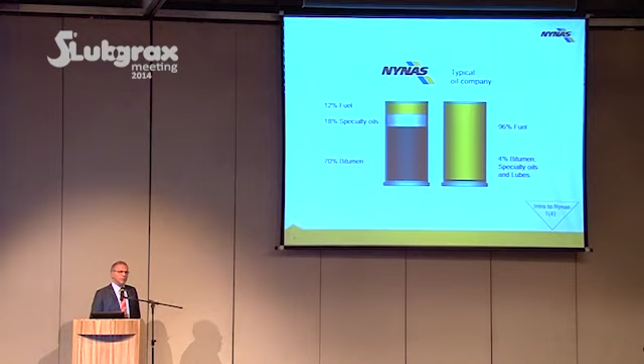Nynas is a different company compared with most of the oil companies around you. We are not a fuel producer - in fact, fuel is a byproduct to us. Our concern, our R&D and activity, focus mainly on bitumen and base oils. That's why we have specialists toward many applications which are unique, because many oil companies, with all respect to their skills, have fuel as their main business. Fuel is a byproduct to us - we would like to get rid of fuel.

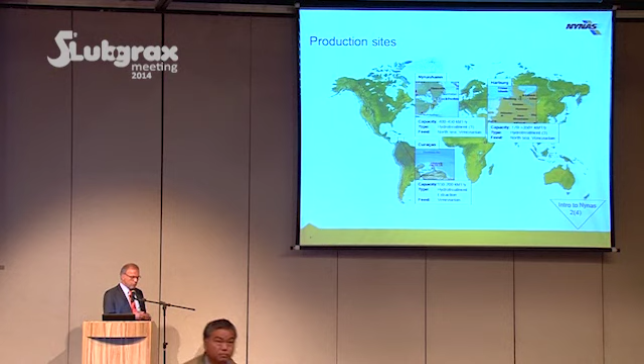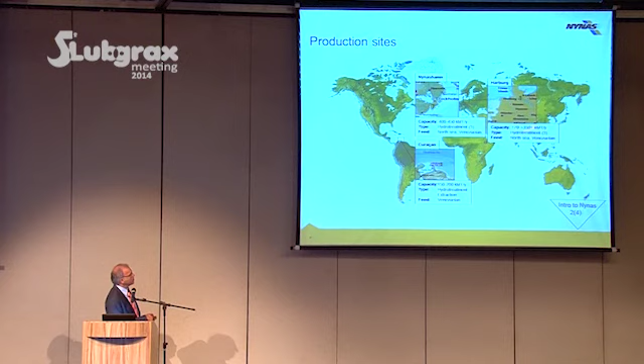We have three main naphthenic refineries. One close to you in Curaçao, outside the Venezuelan border, a Dutch-governed island. The second is located in Stockholm, close to my home. The third, which we took over in January 2014, is located in Harburg, Germany - it was a former Shell refinery. The capacity today for this new site is about 170 kiloton per year, but within two years we are going to double this capacity.

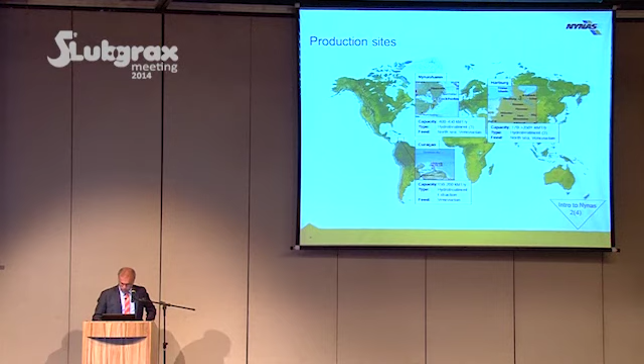Just a couple of slides about some applications where our oils are used today - the list could be more than 60 or 70, but here are just a few you probably recognize. We divided our department into four sections. We have CMI, chemical industry, where we send our product to industrial rubber, adhesive, batteries, and so on - we've been very successful in the tire industry globally. Moving to the third, lube industry - grease, hydraulic, metalworking fluid, and so on. Last but not least, our main business is electrical industry - we are a world leader in transformer oils.

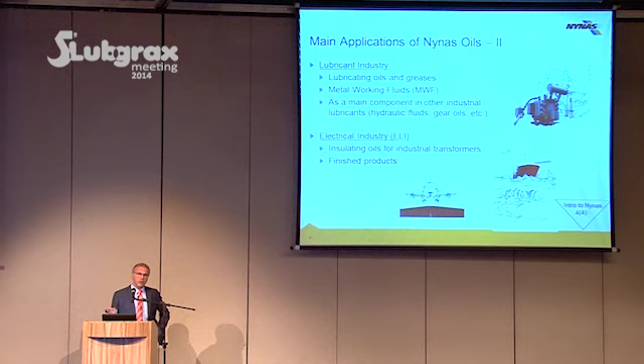We offer customers fully formulated products that fulfill international, national, and even industry standards. But the topic today is grease.

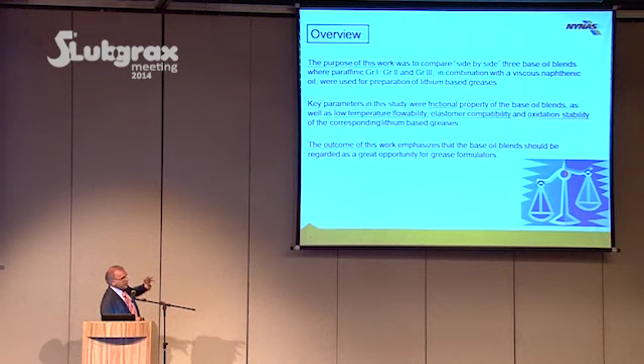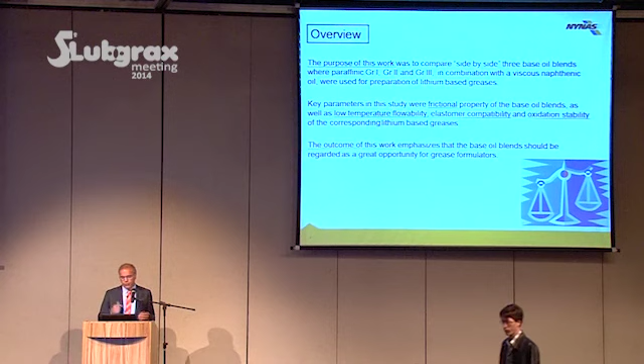Okay, this is the overview. After this slide, if you want to go to sleep, you can do that. The idea is exactly as I said, to move on from Group 1, paraffinic Group 1. It's an excellent product - I'm not here to throw a stone at any single product. All products are good, but now we have access to Group 2 and Group 3. We should enjoy and introduce Group 2 oil into the lube and grease industry.

Blending has shown in many cases that it is a very good move. So what we did was use three commercial paraffinic oils - one Group 1, one Group 2, and one Group 3 - and then upgrade the viscosity to 150 centistokes by adding different amounts of naphthenic oil to those.

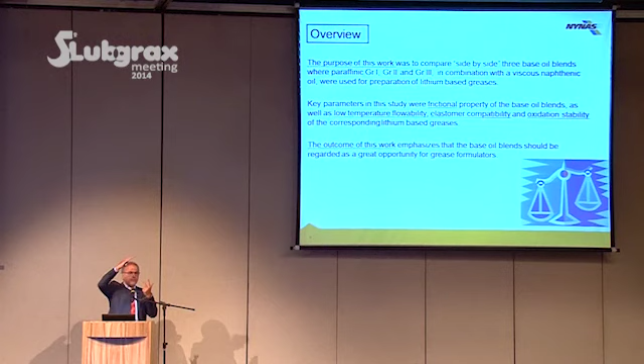And then we characterize the product, the blend, with some typical characterization as we do regarding the base oils, but also some unusual ones, like frictional behavior, elastomer compatibility, and so on.

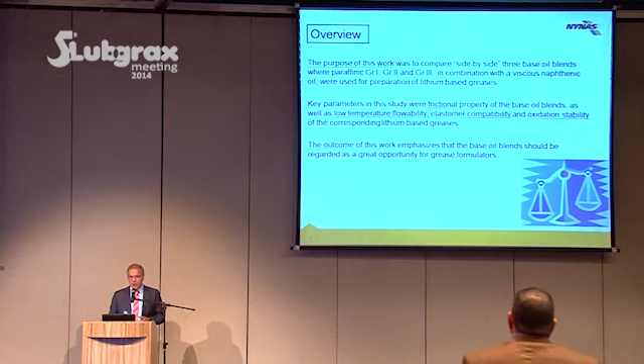When it comes to greases, we also studied low temperature flowability and elastomer compatibility. Elastomer compatibility is very crucial to, for instance, the automobile industry. For CV joint grease, it is important that your lubricant is compatible with a certain type of rubber, very often nitrile butadiene rubber or chloroprene. In this study, we use chloroprene.

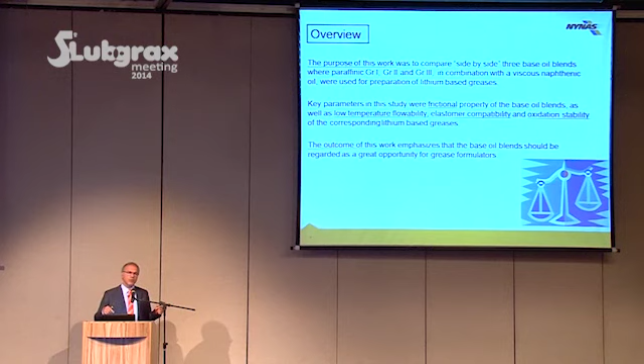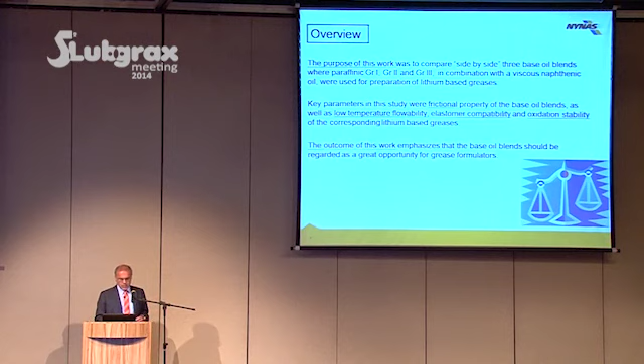So we made lithium greases based on those 3 oils. The outcome is that it's a great opportunity for grease makers to upgrade their current formulations just by blending.

A short chart for those of you who are not aware where we belong in the naphthenic business. As you can see, within paraffinic oil we have group 1, 2, 3. There are several factors which separate these oils from each other, viscosity index and sulfur content among those.

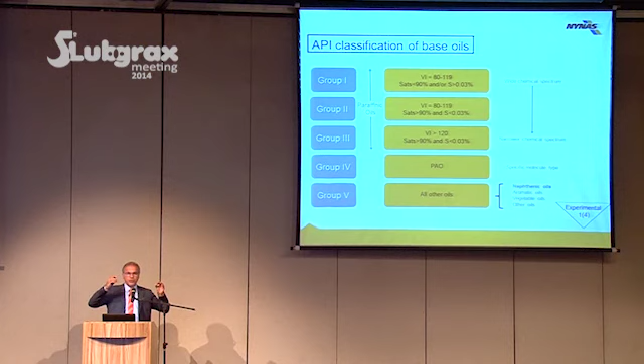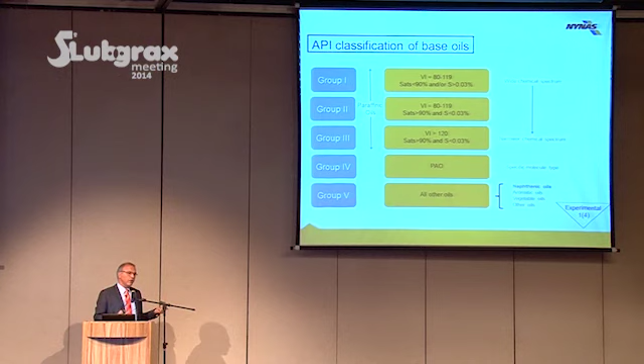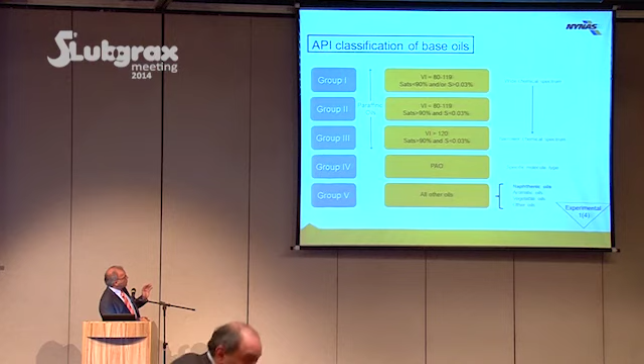But they have excellent oxidation stability. When it comes to naphthenic oils, all other oils which do not have anything in common have been dumped into a box called Group 5.

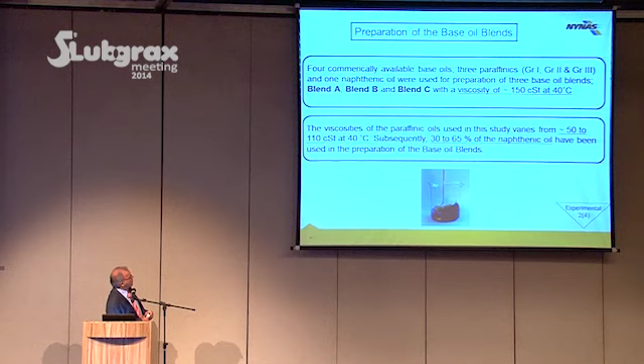This is what we did. As I mentioned, we prepared 3 blends at viscosity 150 centistokes, using different amounts of naphthenic oils. The reason is that the starting viscosities of these 3 paraffinic oils ranged from about 50 to 110.

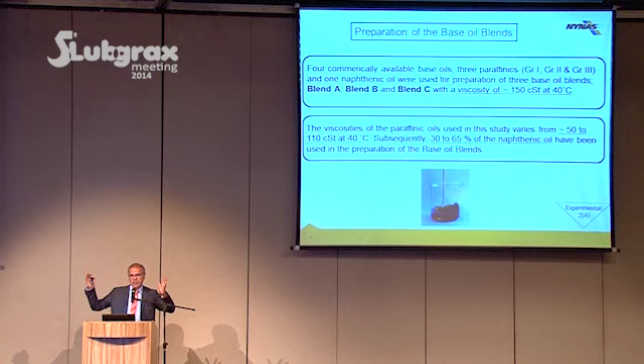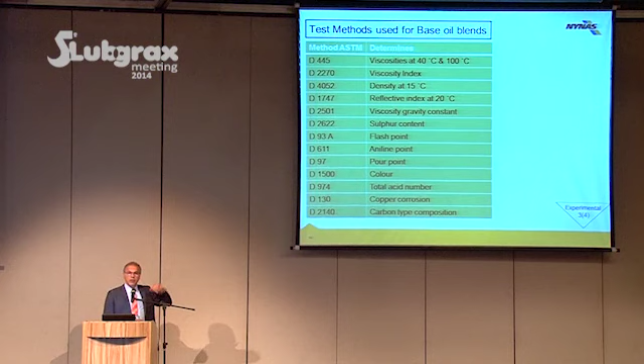These are the typical tests which normally a refinery carries out and offers to their customers. That's why we did it, in order to have a reference to compare, to refresh your memory, or if you want to compare with some current products, so it's easier.

On top of that, we did some additional tests: wax crystallization in paraffinic oil. Wax exists despite the dewaxing unit. I will come back to that.

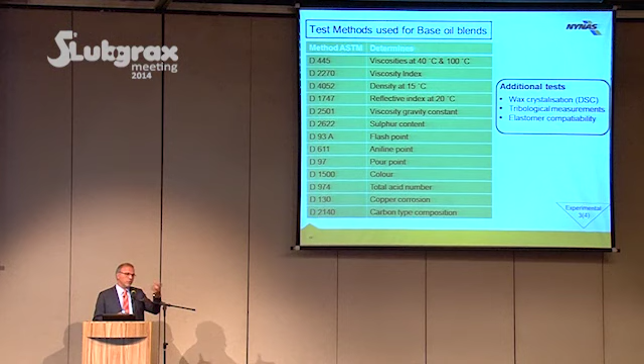Tribological measurement: we measure, as mentioned, the frictional coefficient of the blends compared with each other. Elastomer compatibility: how rubber changes when it comes into contact with the oil, or oil and greases.

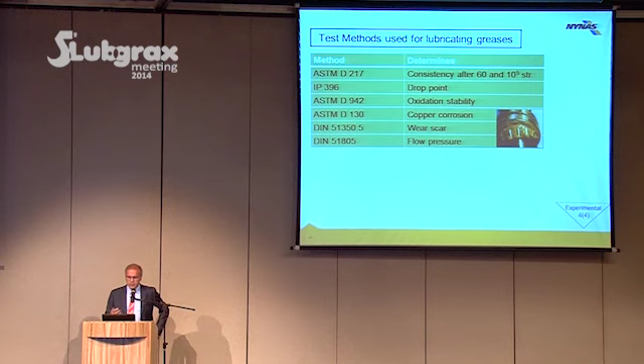When it comes to greases, we did these characterizations, which I won't go through in detail—typical consistency, dropping point, oxidation stability, and so on. But on top of that, we carried out elastomer compatibility testing and a new test method which was introduced just 3 months ago in Europe.

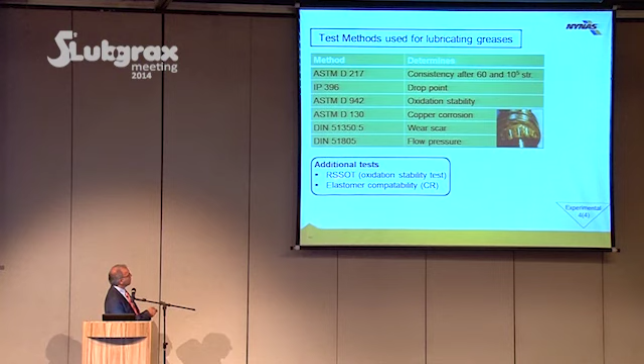It's called an oxidation test—it's a kind of response to oxidation, measured in a pressurized system. I will go into that later on. But what you measure is the induction time.

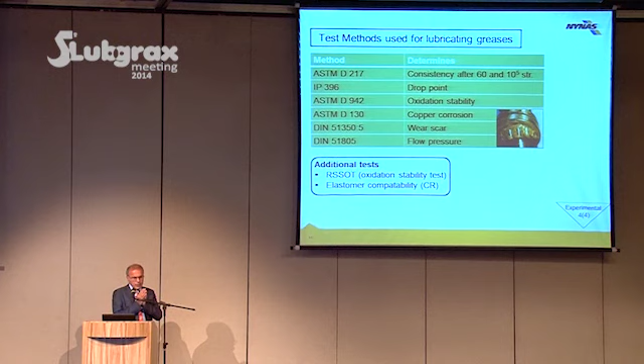But my question very often to the grease maker is, what is the sufficient viscosity index? What is good and what is poor—100? 95? In hydraulic applications, viscosity index is very important. In grease, it's not as important.

We had a presentation from Lubrizol where we saw the use of functionalized polymer in order to increase the adhesivity of the product. By using a small amount of polymer, you not only improve adhesivity, you also improve film thickness as well as the viscosity index of the oil.

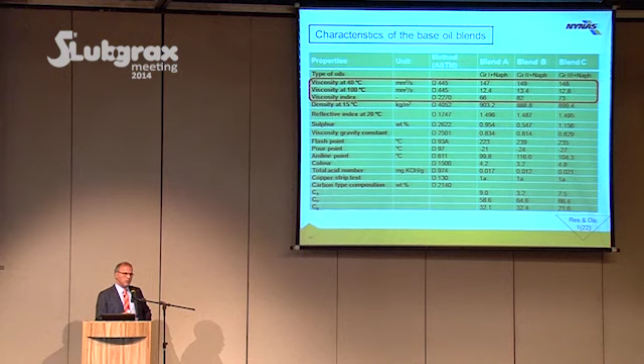On top of that, you have the contribution from the soap—soap contributes to separating surfaces. So indeed, viscosity index in greases should be discussed differently from other applications, such as hydraulic.

Anyhow, sulfur content is interesting because we have found that a certain type of sulfur molecule has a great impact on the oxidation stability of the final product in application, and that kind of sulfur has almost zero impact on corrosion. So it is also interesting. This high amount of sulfur you can see here is coming from the naphthenic oil which we used for this particular study.

The pour point of the paraffinic oil was about -10 to -12 degrees C. After blending, we ended up at -24 plus or minus 3 degrees C, which is very good.

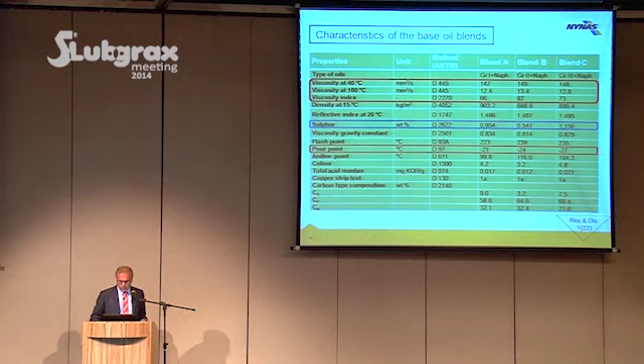When it comes to wax crystallization and pour point, there is a very clear relationship between these two. When we measure the pour point and offer you, as an oil supplier, that number, you accept it as is, and based on it you design and recommend a product to your customer. Our investigation has shown that we misjudge the performance of an oil if it is paraffinic, and we rely on a certain number called pour point.

Let me explain it a little better. When you measure pour point, you put some oil in a jar, and once you have a steady state, the jar moves toward 90 degrees. If it flows, the jar goes back and the temperature drops 3 degrees, and it continues until the moment nothing is flowing during 5 seconds.

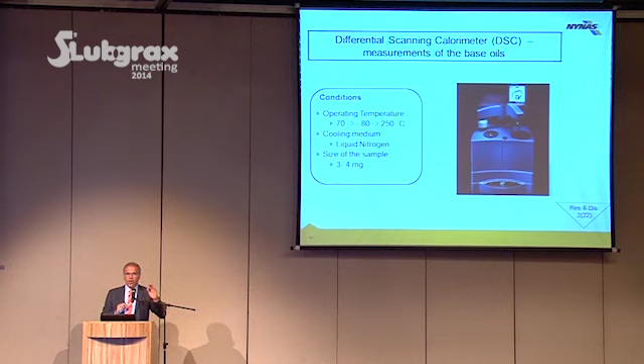Not 6 seconds, 5 seconds. So you get the number, but it doesn't tell you whether that lack of flowability was a result of the high viscosity of the oil or the solidification of the oil. Because if you have wax inside the oil, it will solidify and block the pipe. This kind of test reveals what I state here.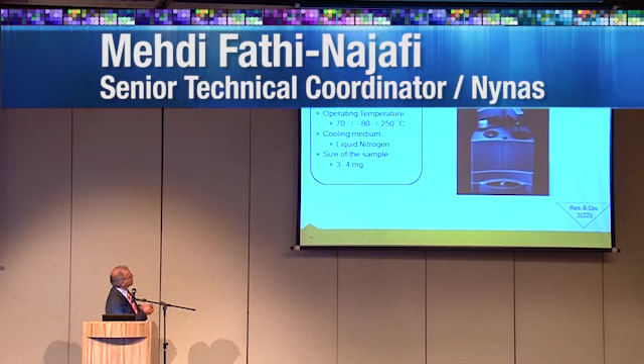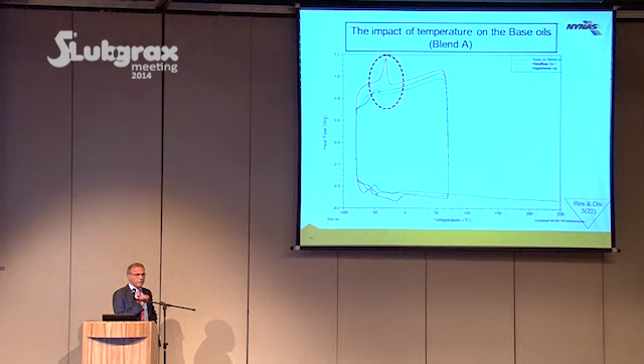So what we did: the oil was cooled down to -80 and then heated up to 250. The red one is group 1, paraffinic. The blue one is the naphthenic we use, and the green one is the mixture. This peak represents wax crystallization. When we mix it, we reduce the impact of that wax, or postpone the creation of the wax to a lower temperature. This is thanks to the high solvency power of naphthenic oil, so it dissolves the wax. We see the same for group 2 and group 3, which I won't go through.

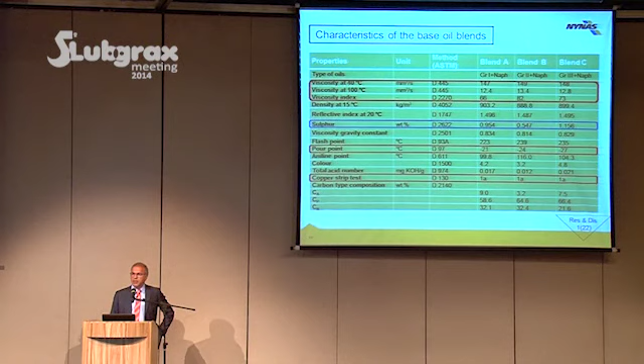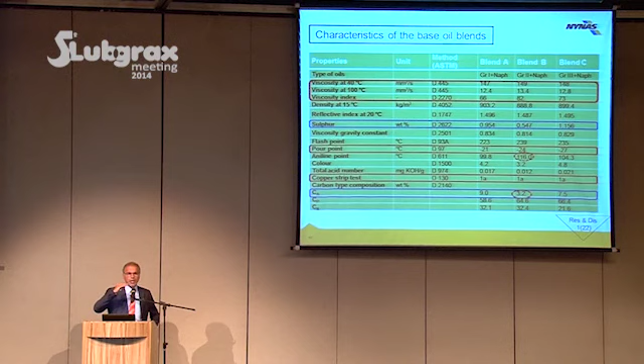Okay, copper strip. I mentioned we had high sulfur content in the oils, which was a risk for negative impact on the copper test. What we see here is that we got the best rate. The aromatic content is lower for group 2 because it contains less naphthenic oil. The aromatic content is linked to aniline point, which is key when it comes to the solvency of an oil. So the lower the aniline point, the better solvency you may expect. I won't go through those numbers again.

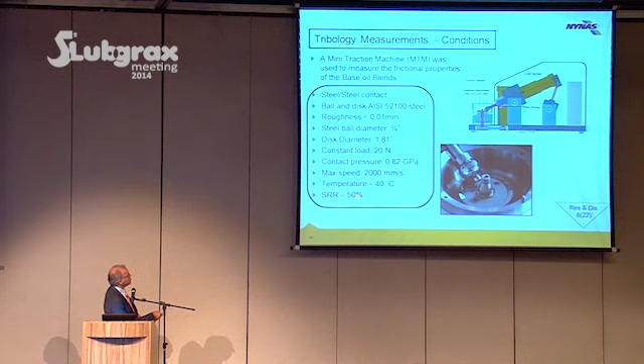This is the tribological test method we use, the MTM machine, mini traction machine. Most of these numbers are standard. This number, 20 Newton, translates to a contact pressure of 0.82 gigapascal. The test was performed at 40 degrees C because at that temperature we had 150 centistokes for all 3 base oils. What we see here is the traction coefficient, equivalent to friction coefficient, as a function of speed up to 2 meters per second.

Blend B, which contains group 2 and naphthenic, shows a slightly better behavior. However, all of these are much better than single group 1, according to our study, as well as single naphthenic. So the combination, in fact, was better than the single oil.

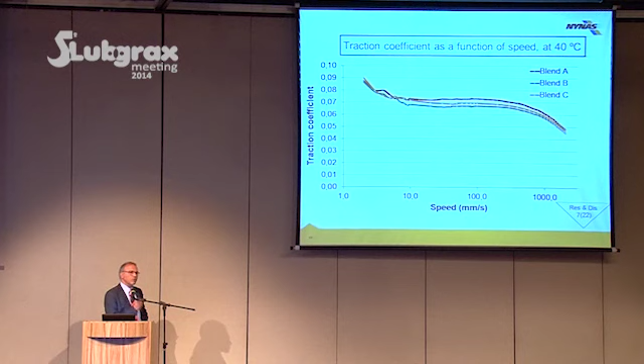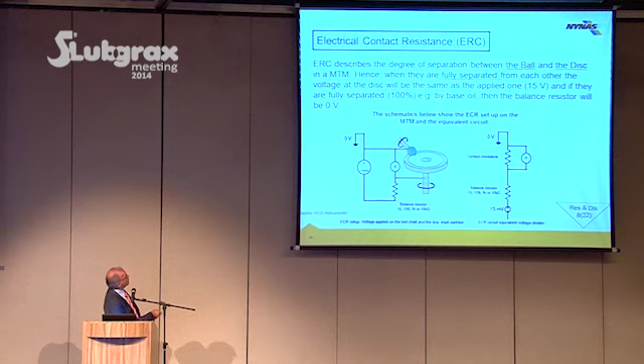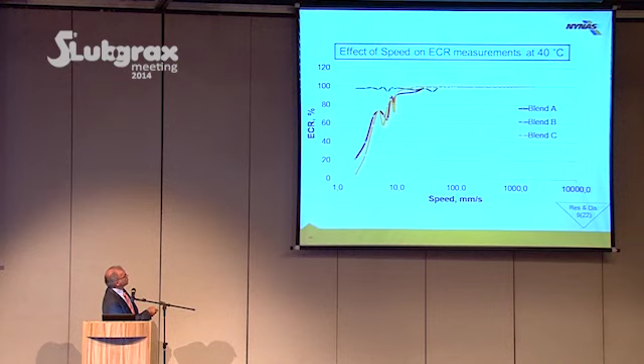With the help of this machine, we could also study the film thickness, or how robust the film is between two pieces of metal - this is a disc and this is the ball. If they are 100% in contact with each other, we get a voltage of 15, which we can register. If we have a kind of separation, or fully separated film between the pieces, thanks to our oil or grease, it will show 0. What we saw is that at lower speed, blend B outperformed the other two - the film breaks down at lower speed for them, but blend B, containing group 2 and naphthenic, continued to be stable.

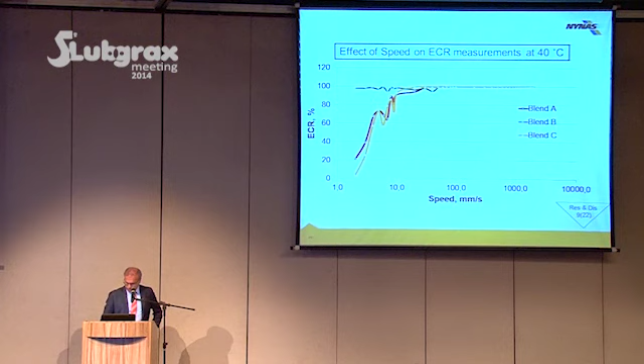Okay, now we move to greases.

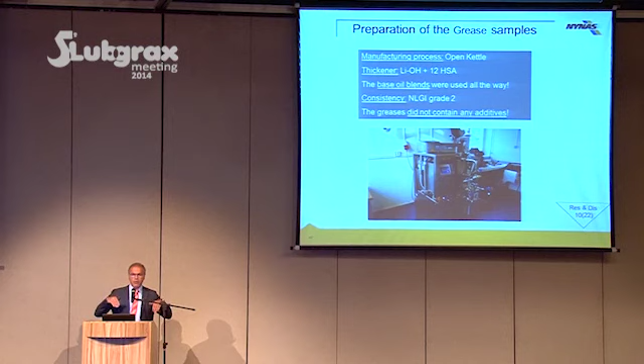So what we did, we prepared greases. Conventional greases, of course, as you know, is lithium hydroxide plus 12-hydroxystearic acid. So we used it in open kettle form. The consistency was NLGI grade 2, which is very common. And we didn't use any additives, because the idea was to evaluate the impact of the base oils on the final formulated greases. So these are some of the properties which we generated on the greases.

What we see is that, first of all, the grease is quite stable, because this number, penetration after 100,000 strokes, is a way, for those of you who are not aware about these test methods, to expose too much shear to the grease and see how much the grease softens. So 100,000 is an enormous number. Probably after 50,000 you get the same result, but this is the standard you have to follow. And everything below 50, for instance according to SKF, a bearing manufacturer, is acceptable.

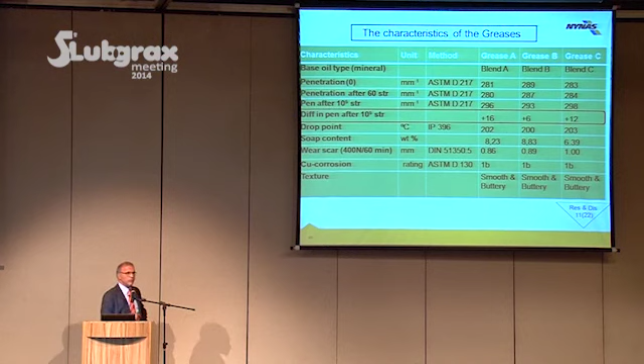So we see here that all products are good, and we shouldn't take these numbers too seriously, because the repeatability of the test method is plus or minus 8. So those are in the same range.

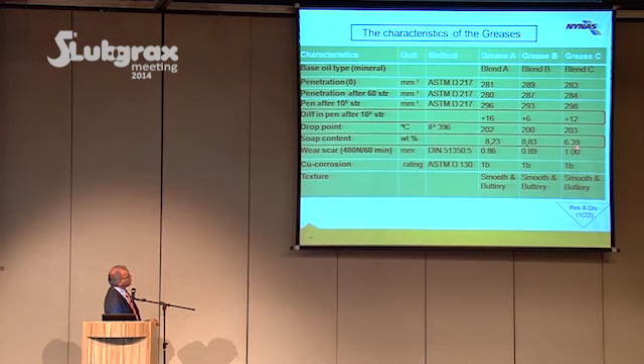The soap content is interesting. We have reasonably good soap content, 8.2 up to 8.8 for these two. And for grease C, where we have mostly naphthenic oil, we have less than 6.5%.

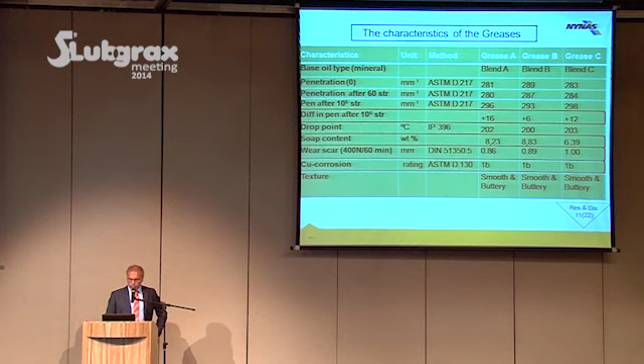And the reason for that, in the next slide I will show you. The wear scar is in line with the normal grease, so nothing to explain, it's just in order. Copper corrosion is still very good, 1B, without having any additives.

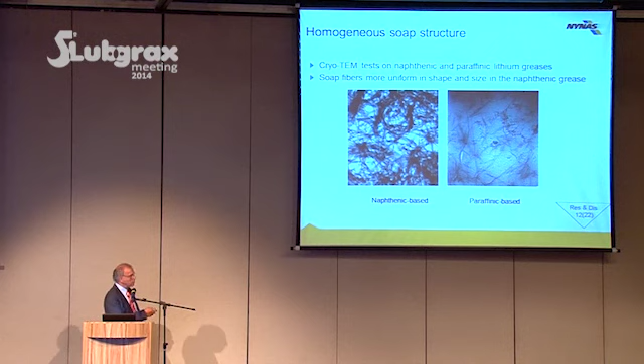This is the reason why when you use naphthenic oil, at least partially, you need less soap. On the left side, you have a picture with fibers of soap, if you'd like to call it, which is much more dense and thicker. On the right side, you have the same soap manufactured in a group 1 paraffinic oil. Consequence of that is, if you want to match the consistency of the grease on the right side, made with paraffinic oil, you need fewer fibers, less of this, to reach this consistency.

As you can see, we have lots of small black dots. These are also soap, but they do not contribute significant consistency to the grease.

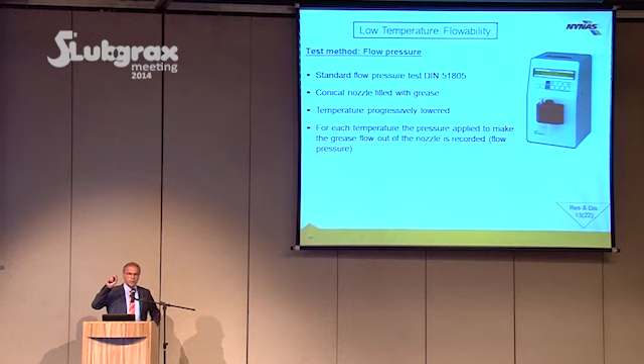Low temperature maybe is not an issue here in Brazil, but in mining it is an issue. One standard test you can use in the laboratory to simulate this is a German test method for low temperature. What you do is apply a small amount of grease, temper it, and then measure how much pressure you need to push it through the nozzle. So we did it at minus 20 and minus 35 degrees C, and here we have the blends.

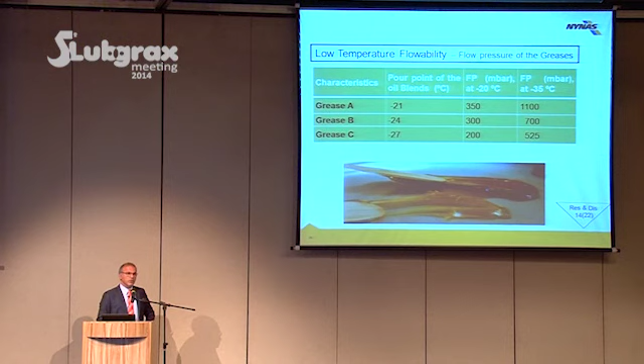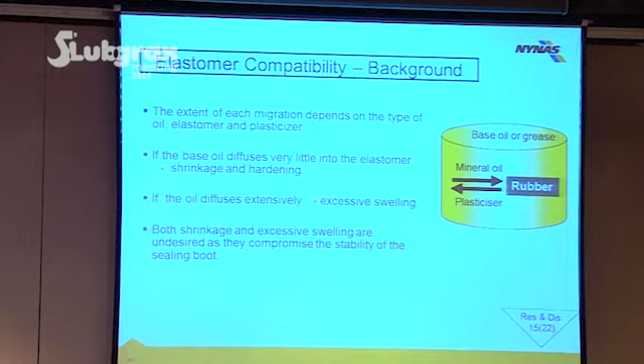I mentioned the automobile industry, for instance CV joints. One of the tests is elastomer compatibility. There's a standard, and the mechanism isn't complicated: mineral oil migrates into the rubber, and consequently plasticizer is pushed out from the rubber. The consequence is that you get a softer or harder rubber. The weight will change because the density of oil is lower than the plasticizer very often. So these are very important to the OEM.

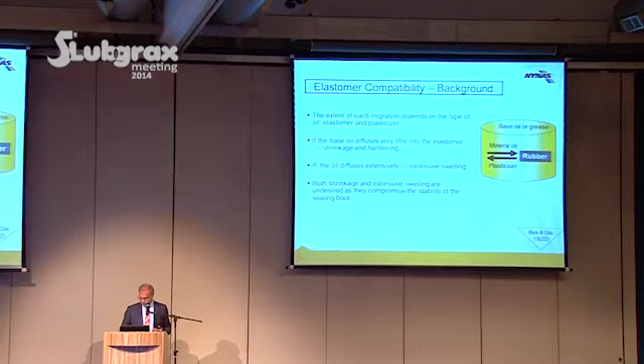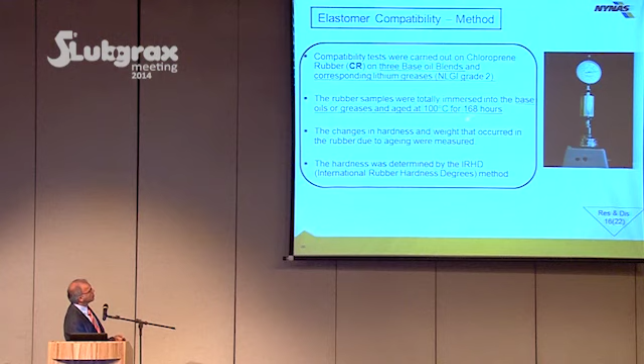So one of the recommended test methods is called International Rubber Hardness Degrees. What you do is measure your grease or oil, immerse rubber into the oil and grease for 168 hours, meaning a week, at 100 degrees C. After a week, you wash it out, clean the rubber, and then measure the hardness, the weight change, and the glass transition temperature changes, and so on.

So what we did was also initially measure these numbers. We ran tests after 18 hours as well as after a week for all three greases. Here you have the weight change as a function for those greases. What we can see, first of all, is that after 18 hours, about 40% of the changes appear. So it's good if you want to screen several greases: you run 18 or 24 hours, then pick your champion and fulfill the test.

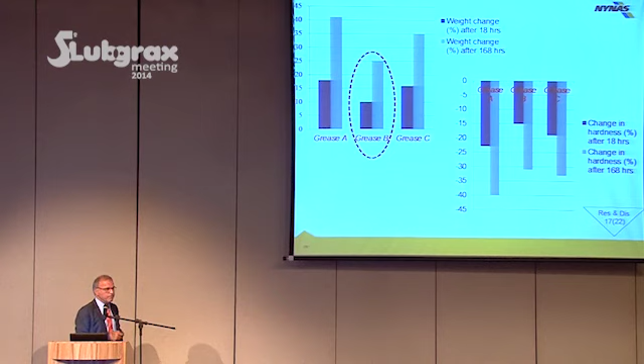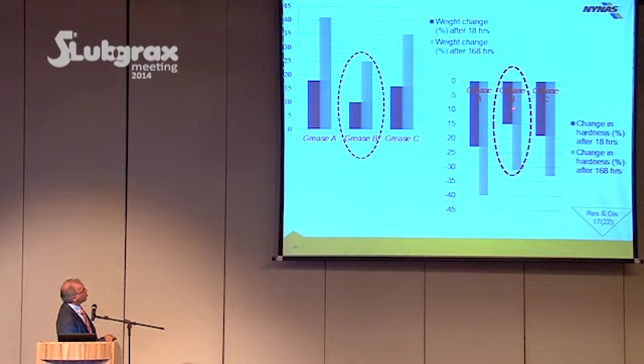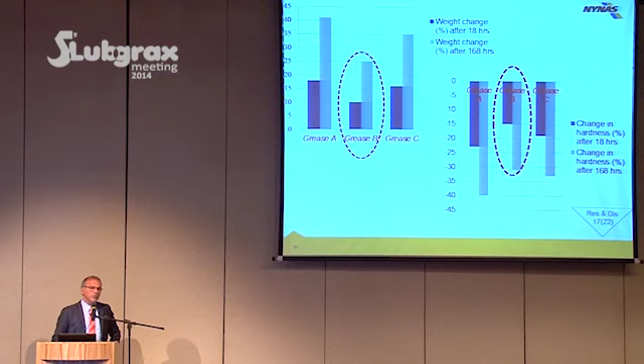The next slide is for change in hardness. We see that this one, grease B, offers less change in hardness. To us, it's not a surprise, because we've published data in the past showing that if you use chloroprene, you have to use an oil with a higher aniline point.

So for future use in your laboratory, if you want to screen some oils and your rubber is chloroprene, use an oil with higher aniline point. If it's nitrile butadiene rubber, use the opposite - use one with lower aniline point.

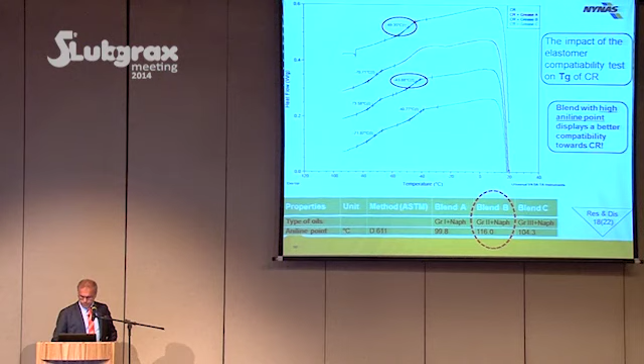This is our last test, but I think it's very interesting, or the most interesting to me as a technician. The picture on the left - on my left side and your right side, no, your left side as well, sorry - this is a standard test method.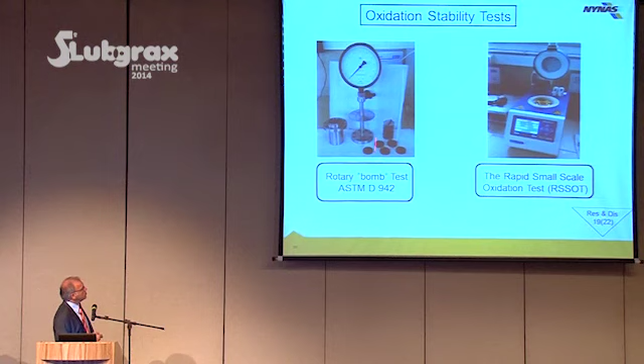It's called the Rotary Bomb test. What you do is apply your grease for 100 hours at about 100 degrees C, and afterward measure the pressure drop. If the pressure drop is less than 5 psi, it is okay for fully formulated greases. In this case, we got 2 psi for all 3 greases, which was excellent.

So the next test, which you see on the right side, is the new test I mentioned. It's called the Rapid Small-Scale Oxidation Test. It's used for the fuel industry, in fact. The speaker at the ELGI conference in Europe, just recently at the end of April, introduced this apparatus or test method with some data. So we felt it would be good to evaluate the good result from a standard test with this new test.

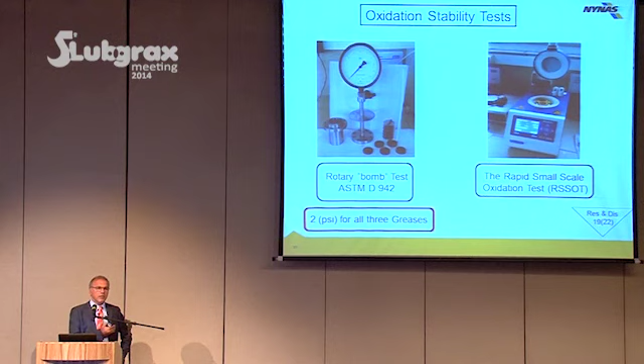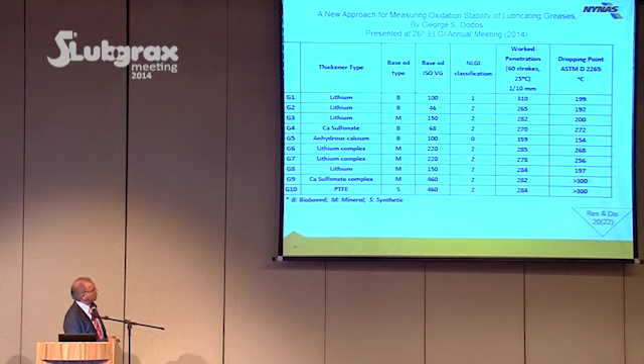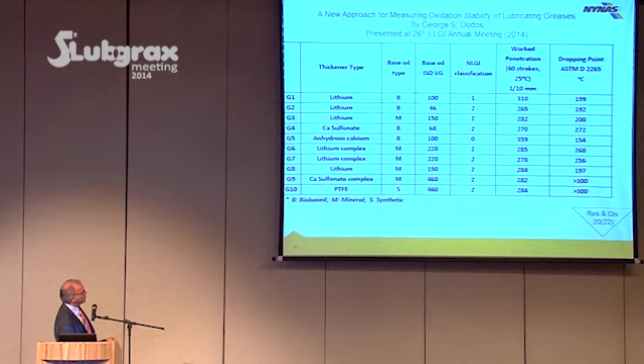So what's happening here is he presented this data for different types of greases, as you can see, from lithium to polytetrafluoroethylene greases, calcium sulfonate, using different types of base fluid - biodegradable or vegetable oils, mineral oil, and synthetic oil. In this case, G10 represents a PTFE grease based on synthetic oil. And here we have the consistency as well as the viscosity of the oils.

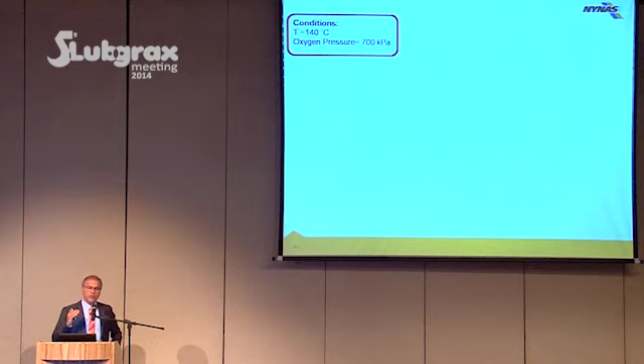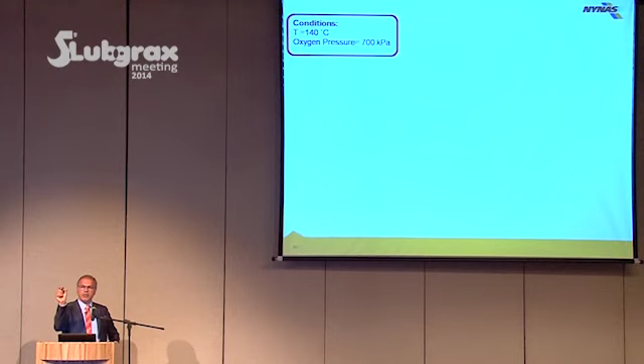So this is the condition: 140 degrees C, and the oxygen pressure applied was 700. The test stops as soon as the pressure drop is 10% below 700 kilopascal, and then they calculate or read off the time - the induction time.

For these products which we presented to you, the mean value we got - the lowest was 500 and the highest was about 800. It's good to compare with the references.

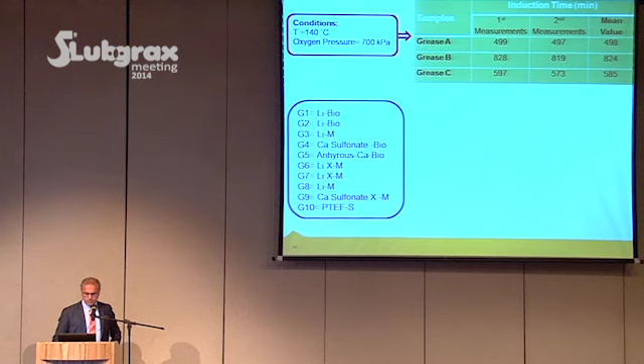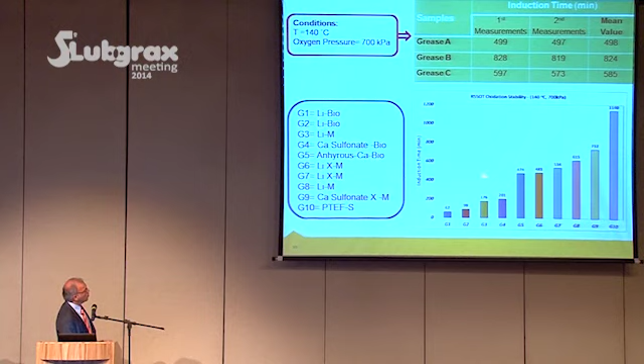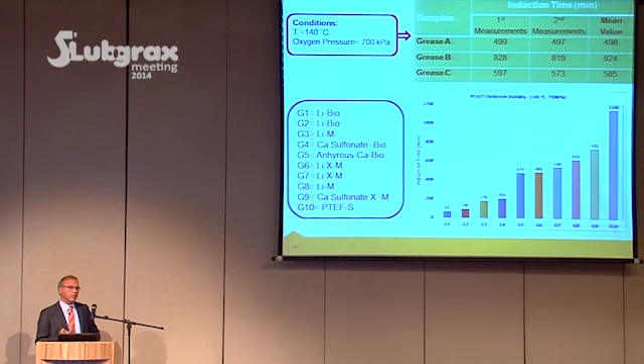Naphthenic oil has been used for ages in the United States and in Western Europe in combination with paraffinic oil. This paper was published some years ago at NLGI US, and I thought it would be good to refresh some memories if you already know that.

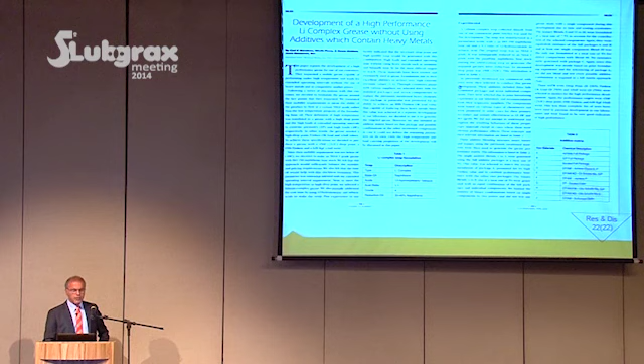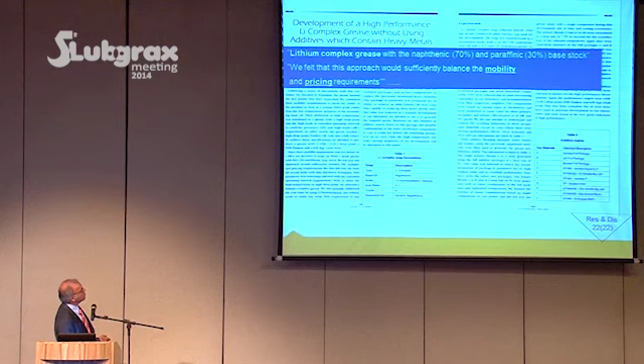Otherwise, to highlight that naphthenic oil could be used even for high temperature type greases - here lithium complex was used. I don't want to test your eyes, so don't try to read it, but this is what they concluded. They made lithium greases, and what they were looking for was good mobility and good pricing. They used 70% naphthenic oil, 30% paraffinic, and they got what they were looking for.

So to finish my presentation, I would like to show this slide. Please, colleagues, be black sheep. Don't do what we did 60 years ago. Don't use a single oil.

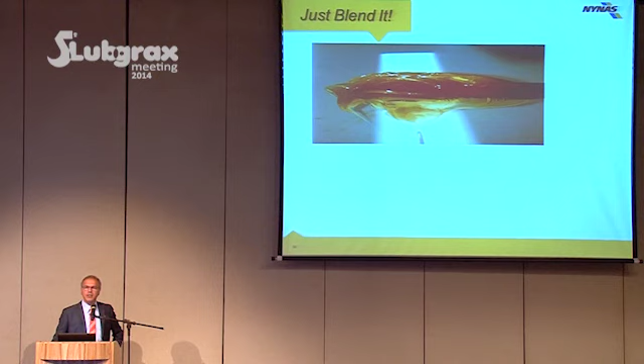With those words, I would copy almost what Nike says - just do it, just blend it. And obrigado, thank you very much.